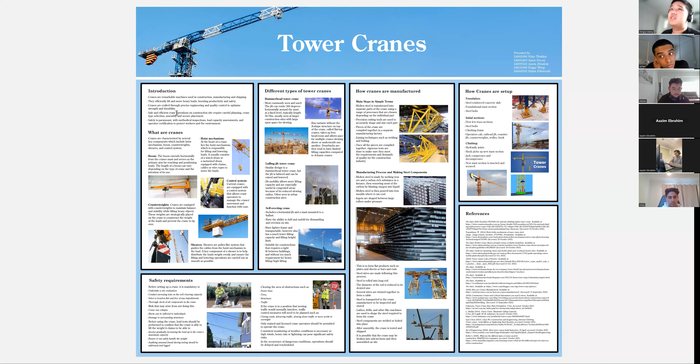Hello, my name is Azim, and this is our poster presentation on tower cranes. If you take a look around you at all the buildings that are so impossibly high, you find yourself wondering how we built these structures so high up. Enter the remarkable invention of cranes.

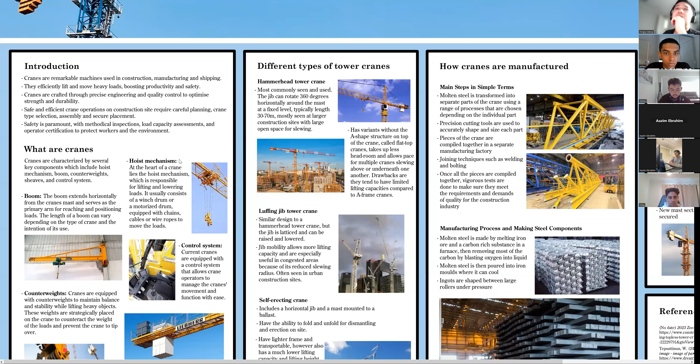Cranes are marvelous machines that have played a pivotal role in the shaping of our modern world. They are versatile mechanical tools designed to lift and move heavy loads efficiently. Their utility resides in significantly boosting productivity and safety across parts such as construction, manufacturing, and shipping by skillfully handling considerable amounts of loads. Crafted through precise engineering and meticulous quality control, cranes undergo careful manufacturing to ensure that the strength and durability of the machines are optimized.

On construction sites, careful planning, crane type selection, assembly, and secure placement must all be taken into consideration before any and every use of the cranes to ensure safe and efficient operations. Safety remains paramount with methodical inspections which include load capacity assessments and operator certification needed to safeguard all workers and environment during crane use.

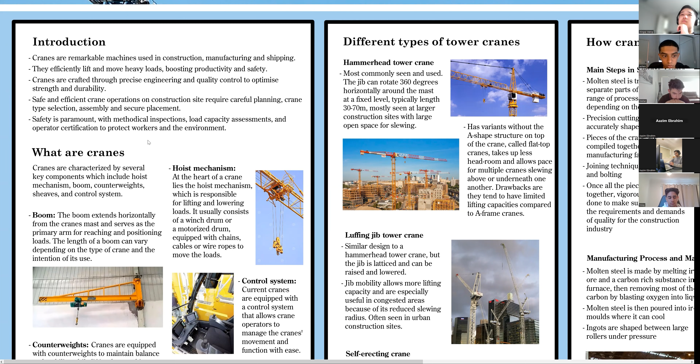What are cranes? Cranes are characterized by several key components, which include hoist mechanism, boom, counterweights, sheaves, and control system. At the heart of a crane lies the hoist mechanism, which is responsible for lifting and lowering loads. It usually consists of a winch drum or a motorized drum, equipped with chains, cables, or wire ropes to move the loads.

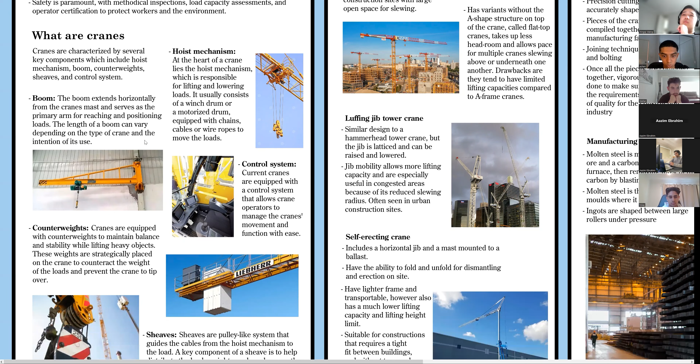The boom extends horizontally from the crane's mast and serves as the primary arm for reaching and positioning loads. The length of a boom can vary depending on the type of the crane and the intention of its use. The current cranes are equipped with a control system that allows crane operators to manage the crane's movement and function with ease. Cranes are also equipped with counterweights to maintain balance and stability while lifting heavy objects. These weights are strategically placed on the crane to counteract the weight of the load and prevent the crane from tipping over.

Sheaves are a pulley-like system that guides the cables from the hoist mechanism to the load. A key component of a sheave is to help distribute the load weight evenly and ensure that the lifting and lowering operations are carried out as smoothly as possible. I'll hand it over to Alex.

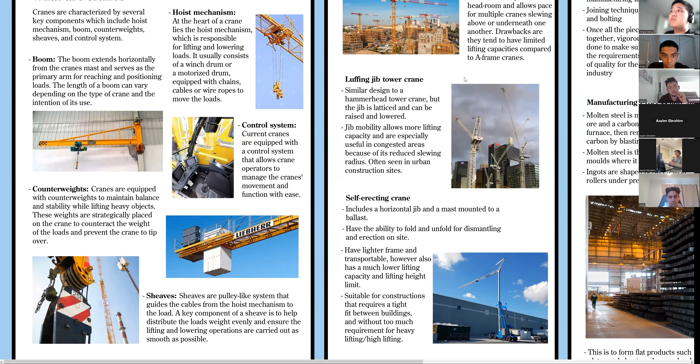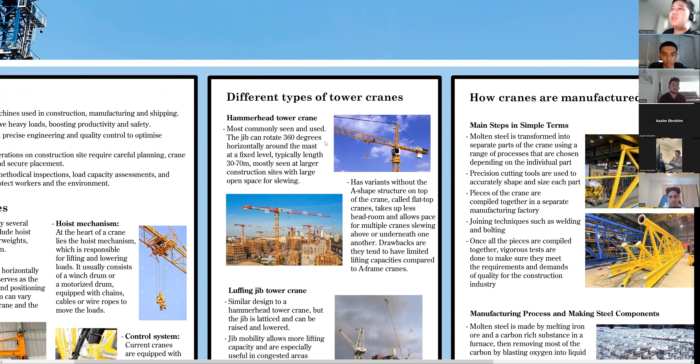Hi, this is Alex, and I'll talk you through a few different types of common tower cranes. The most commonly seen one is called hammerhead tower crane, and its jib can rotate 360 degrees horizontally at a fixed level, and it typically ranges in length from 30 to 70 meters. This type of crane is mostly seen at larger construction sites with large open space for slewing of the jib.

There is also a variant without the A-shaped structure on top of the crane called the flat top cranes. It takes up less headroom and allows space for multiple cranes slewing above or underneath one another. Drawbacks are they tend to have limited lifting capacities compared to A-frame cranes.

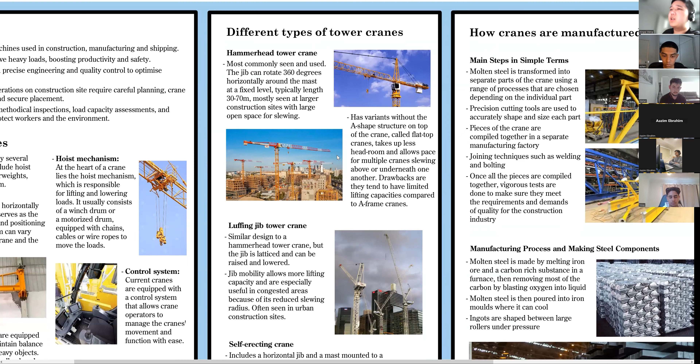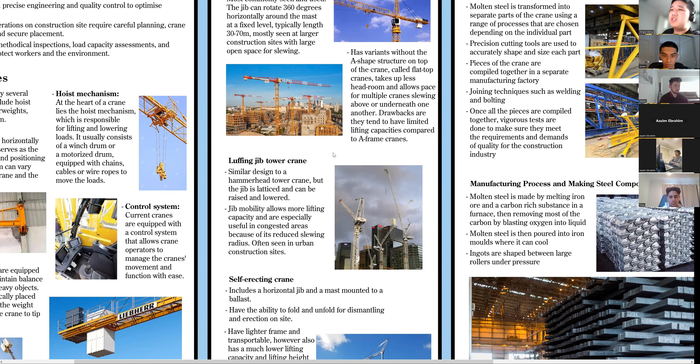Another common type is called luffing jib tower crane. It's a similar design to a hammerhead tower crane, but the jib is latticed and can be raised and lowered. Jib mobility allows more lifting capacity and is especially useful in congested areas because of its reduced slewing radius. It's often seen in urban construction sites.

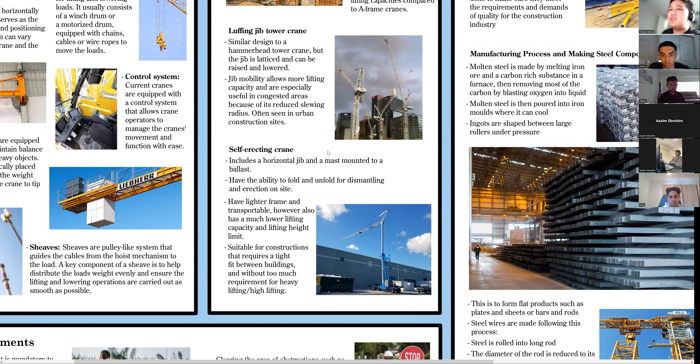Another common type of tower crane is called self-erecting crane. It includes a horizontal jib and a mast mounted to a ballast. It has the ability to fold and unfold for dismantling and erection on site. It has a lighter frame and is transportable, however, it also has a much lower lifting capacity and lifting height limits. It's suitable for constructions that require a tight fit between buildings and without too much requirement for heavy lifting or high lifting. I'll then pass it to Stefan.

Hi, I'm Stefan. I'm going to speak about the safety requirements of setting up a crane on a job site. Before setting up a crane, it is mandatory to undertake a site evaluation to confirm the ground conditions are stable and capable of withstanding the weight of the crane. Surveying tests are used by engineers to determine the soil's bearing capacity. This is then compared to the crane's maximum load capacity, and if it's equal to it or more, then the location is adequate. The location should be flat and free of any impediments.

The reason why it is so vital to have a strong foundation for the crane is if the surface is unstable or soft, it can lead to the crane collapsing and harming individuals and the surrounding structures. Before using the crane, load tests should be performed in order to confirm that the crane is able to lift the weight it claims to. These tests involve gradually increasing the load up to the crane's maximum capacity to ensure it can safely handle the weight.

Clearing the area of obstructions such as power lines, traffic, trees, or other equipment that might interfere with the crane's operation is essential. If the crane must be positioned in a position where moving traffic would normally interfere, traffic control measures will need to be planned and put into place prior to the setup. This can include closing roads or detouring traffic to ensure the safety of the individuals in the proximity.

Moreover, only trained and licensed crane operators should be permitted to operate the crane. Before operation, the individual should be assessed on whether they are aware of all safety procedures and emergency procedures. Additionally, consistent monitoring of weather conditions is necessary, as high winds or heavy rain can pose significant safety risks. If the conditions are dangerous, operations should be delayed and rescheduled. If a dangerous weather condition occurs, after the incident, the soil and surface should be inspected to ensure there are no safety risks.

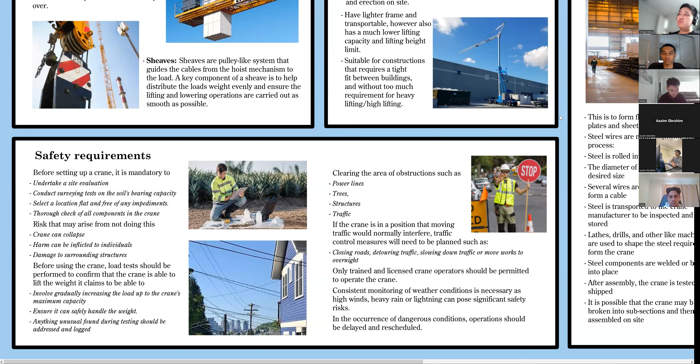This is Nilo, and I'll be talking about how tower cranes are manufactured. So there are 5 main steps in the process, which include molten steel being transformed into separate parts of the crane using a range of processes that are chosen depending on each individual part. Then precision cutting tools are used to accurately shape and size each part, and pieces of the crane are then compiled together in a separate manufacturing factory.

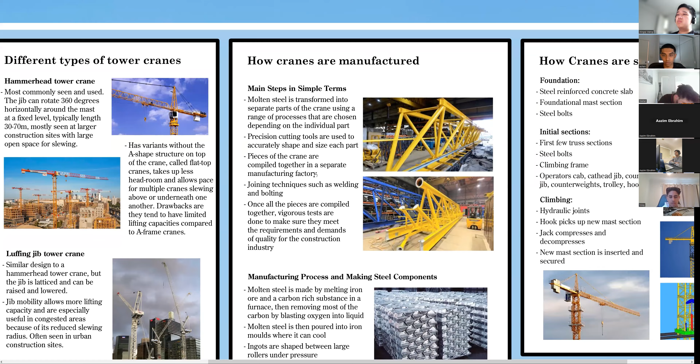Joining techniques such as welding and bolting are used to join the parts of the crane together, and once all the pieces are compiled together, rigorous tests are done to make sure they meet the requirements and demands of quality for the construction industry. In more detail, molten steel is made by melting iron ore and a rich carbon substance in a furnace, then removing most of the carbon by blasting oxygen into the liquid.

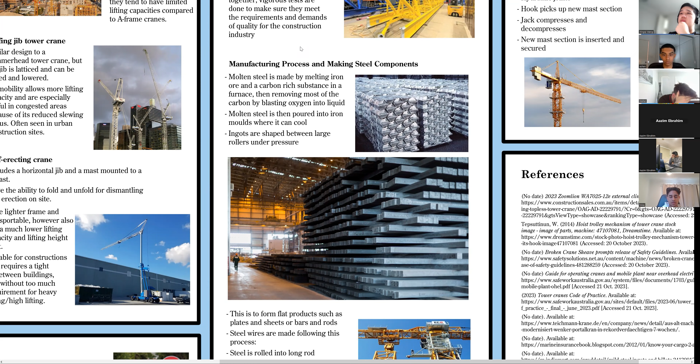Molten steel is then poured into iron molds where it can cool, and ingots are shaped between large rollers under pressure. This is to form flat products such as plates and sheets or bars and rods. The diameter of the rod is reduced to its desired size when steel is rolled into a long rod, and several wires are twisted together to form a cable. Steel is then transported to the crane manufacturer to be inspected and stored.

Drills and other like machines are used to shape the steel required to form the crane. Steel components are welded or bolted into place as mentioned before. After assembly, the crane is tested and shipped, and it's also possible that the crane may be broken into subsections and then assembled on site.

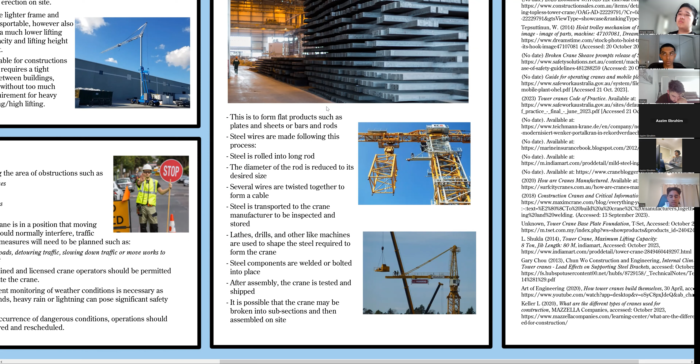Good afternoon, my name is Ashton, and I'll be briefly covering how cranes are actually assembled. So before any part of the crane is assembled, a solid foundation must be built beforehand, and this is why we generally use steel reinforced concrete, which is designed to shoulder the crane's weight and all of its loads, and it also contributes to a better tensile strength of the foundation.

Embedded within this concrete is the foundational mast section, as you can see here, which is securely anchored by high-grade steel bolts and pins. Once this is done, the first few sections are lifted onto the foundation and fastened together using these steel bolts, as mentioned before. And the climbing frame is also added to the mast section, which allows the crane to adjust its height, which I'll explain later. And so is the slewing unit, which allows full 360-degree rotation of the operator's cab.

Then the operator's cab, the cat head, the jib, the counter jib, counterweights, trolley, and of course the hook are also added. And it'll look something like this on this image over here. So as you can see, it hasn't risen to its full height yet. So now the way that cranes climb is by firstly attaching the frame's hydraulic system connections to the mast section. And this is on the climbing frame. You can see over here in this image the hydraulic system.